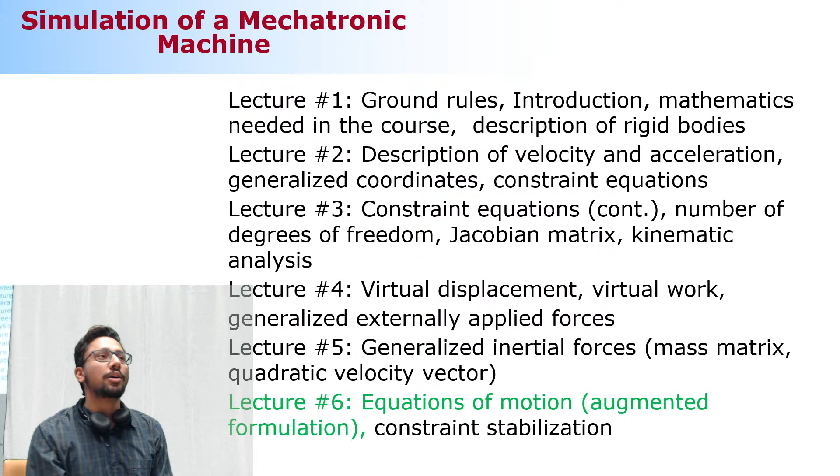Okay, but before that, some sneak peek from last week's lecture. So in last week's lectures, we learned that there are two kinds of forces whenever we are dealing with physical systems, right? There are external forces, and then there are inertial forces. We learned that we can express the external forces in terms of generalized coordinates. Is that word familiar to you guys? Okay, so using external forces, you can express any kind of forces acting on the body, which can be from hydraulic actuators, from pneumatic systems, from spring dampers, from anything, right?

Can you see my face now, online participants? There was a comment. I think yes, now. Okay.

So in a similar fashion, we can also use this inertial forces, and we can express that in terms of generalized coordinate.

Now, what is the difference between generalized coordinate and global coordinate? Can someone answer me that? Anyone?

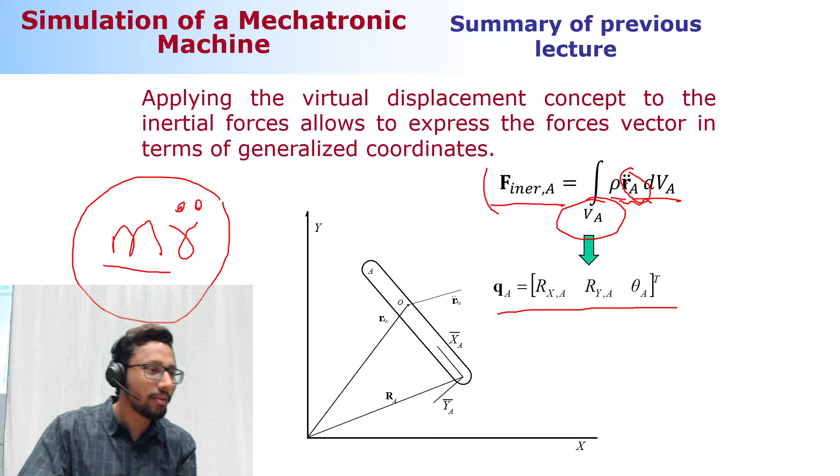Okay, now moving on. So how can we express these inertial forces into generalized coordinates by using mapping? This is that mapping function, and how does it come about? It comes because we use the concept of virtual work, and more specifically, the concept of virtual displacement.

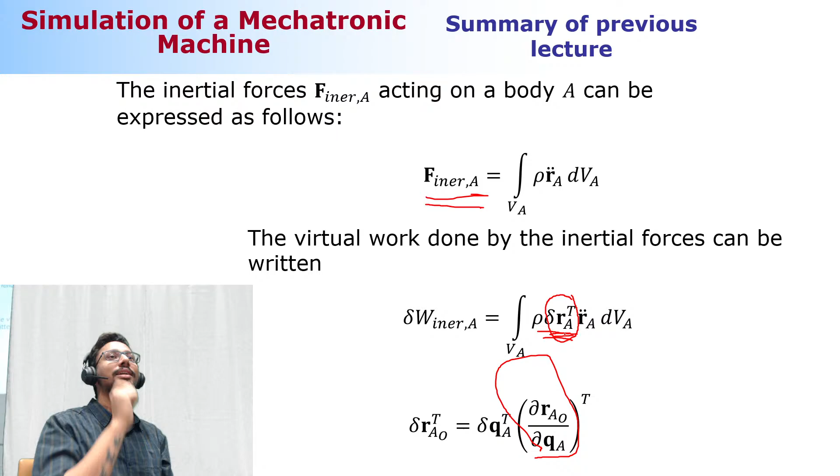So if you consider these inertial forces, and you multiply that with an infinitesimally small position - why this delta? It means it's extremely small. Don't go for the physical interpretation of this. Just mathematically, imagine in your mind that there's a very small movement of this particular body, and this displacement is called virtual displacement. The work associated with this virtual displacement is called virtual work, and for that reason we express virtual work as delta w.

Okay, now we have learned earlier that this mapping between the global coordinates and the generalized coordinates can be done using this mapping, where the mapping is the partial derivative of your position with respect to the partial derivative of all the generalized coordinates.

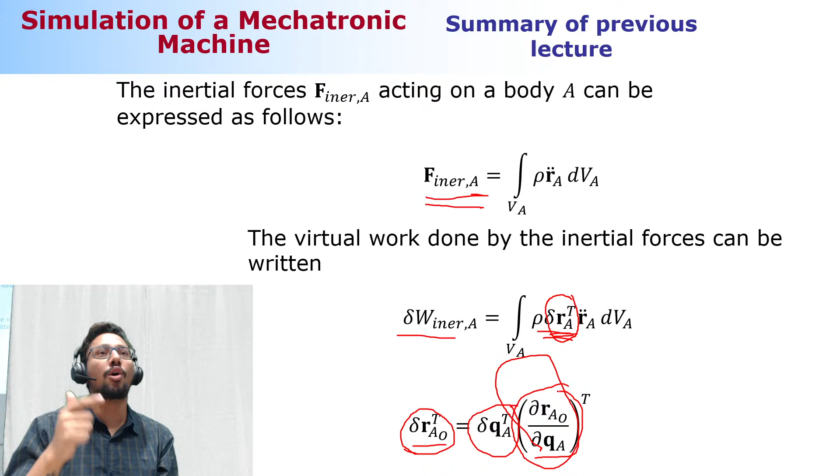So moving on, we have also learned about the acceleration. I'm making some really bad drawings, guys, because I don't have a pointer like Aki, and even my laptop isn't interactive so he could draw on his screen. So I'm trying with my mouse to model it, so bear with me.

But anyway, this acceleration of any point A can be expressed in a standard form, right? We've learned this already, guys. So we are just representing something. We know that a position can be expressed as the position of the center of the body coordinate system plus the rotation associated with it and u bar. This is the expression for the position. When you double differentiate it with time, you get the expression for the acceleration.

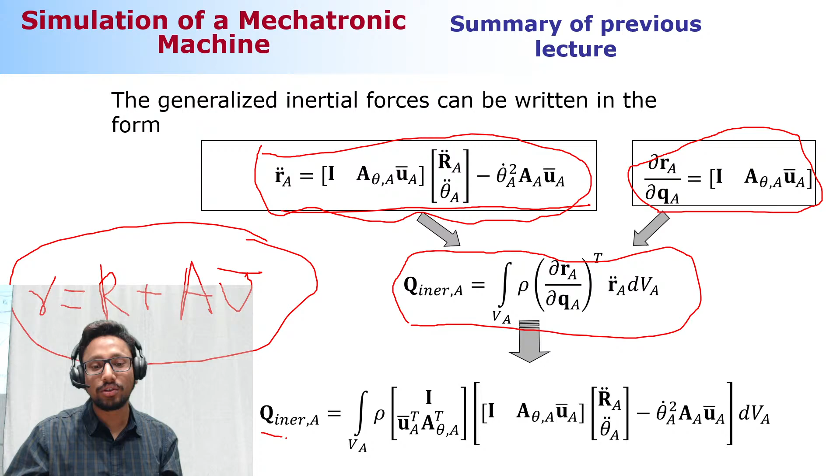And this acceleration can be expressed in a sophisticated form as shown here. Now, when we replace this acceleration term and also this partial derivative of the displacement term, which can be expressed in a sophisticated form as from the earlier lecture, when we use these two expressions within the expression for the inertial force, we can see that the inertial force can be expressed in terms of generalized coordinates, right?

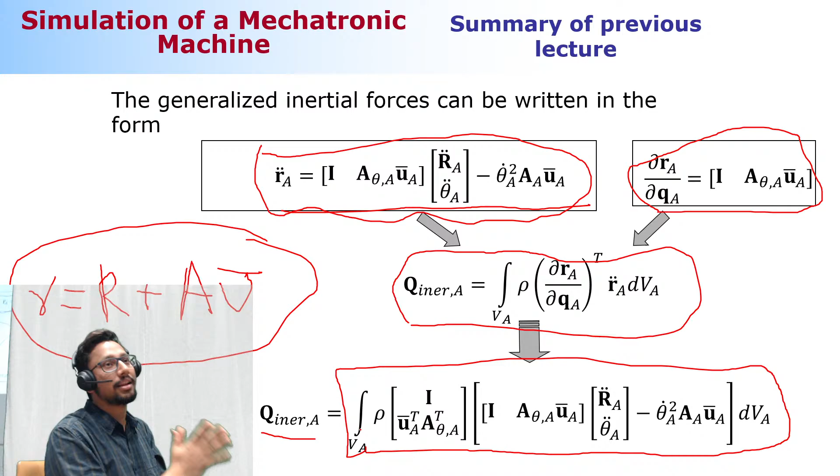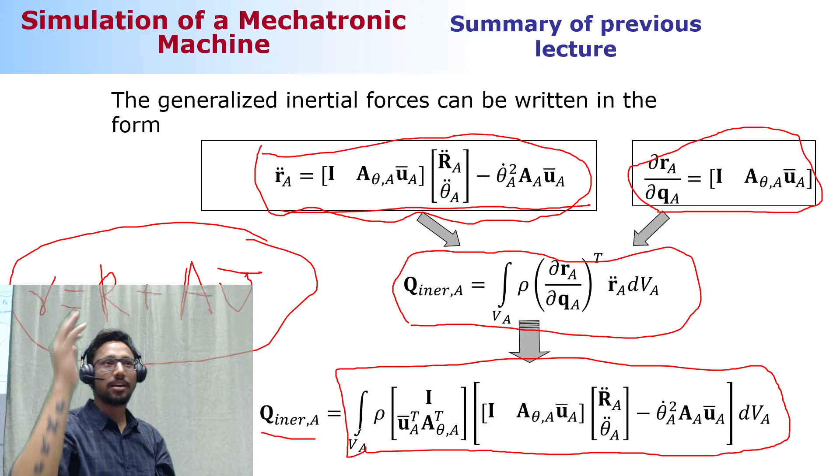So this is the form which you can derive, before the detailed mathematical explanation. Don't worry about the detailed maths involved, try to understand the logic. We are coming from a global coordinate system which has two coordinates in a planar case, and we are shifting to a generalized coordinate system which has three coordinates, right? So when we express this inertial force, how many coordinates should it have - two or three? Three coordinates, correct? So just follow that part.

Okay, now when you see this monster equation, you can see that when you multiply these terms, there will be two terms associated with this inertial force. The first term is some complicated matrix multiplied with the acceleration of the generalized coordinate - correct? This is your generalized coordinate, yes or no? Correct. And similarly, there is another term related to the velocity of the generalized coordinate, and this term is called the velocity vector.

And the first term is called mass matrix. So earlier we had an expression like mass of the body into the acceleration of the generalized coordinate, right? The moment we changed this expression to be expressed in generalized coordinates, we now have a term which is mass matrix multiplied by the acceleration of the generalized coordinate, minus a quadratic velocity vector, because this vector is dependent on the angular velocity of the generalized coordinate in a quadratic form. That's why it's called quadratic velocity vector. Is this clear for you guys?

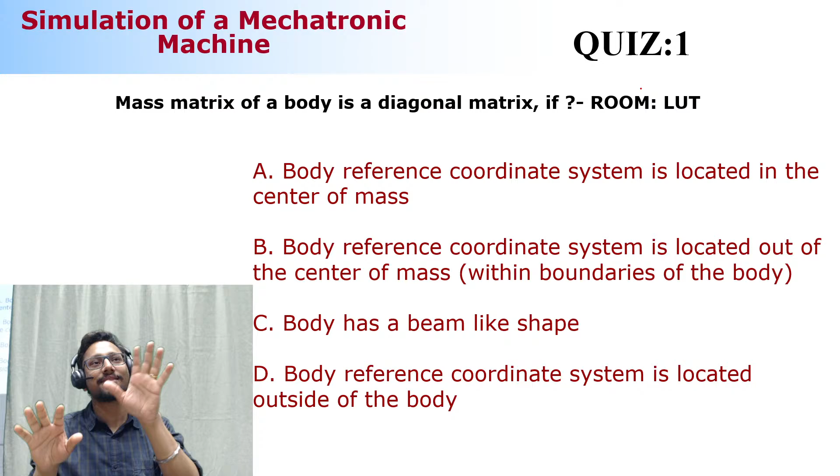As we have learned in the previous lecture, usually the first term is an identity matrix, right? And then the second term is the term associated to the mass moment of inertia. Now, in what condition or situation would the third term - the coupling between the translational and the rotational movement - the mass associated to it be zero? That's what the question is.

And it depends on where the body coordinate system is associated, right? So the body coordinate system can be anywhere from the center of mass to within the body, but not at the center of mass to outside the body, and it should not depend on the shape of the body, right? So what do you guys think? What should be the correct option?

Some guys in the chat window are guessing it to be option A. May or may not be.

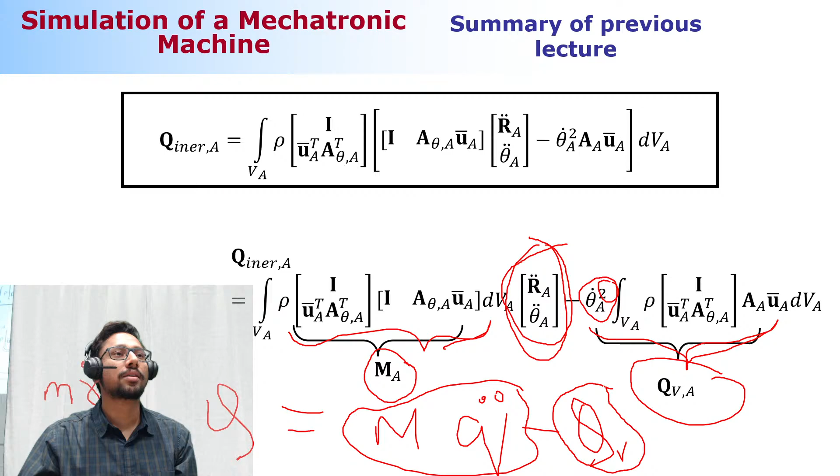So moving on, now let's talk about the quadratic velocity vector. If you learnt earlier in this explanation that when we try to express the inertia forces in terms of generalized coordinates, we end up with this huge mathematical expression. But when we try to simplify, we realize that this Q inertia is a mass matrix multiplied by the acceleration of the generalized coordinate and a term which is the quadratic velocity vector. Correct? So now, what is this quadratic velocity vector?

This quadratic velocity vector, when you take that term, you will realize that it will have three elements. Why three elements? It's because our generalized coordinate has three for a body in space. I'm talking about just one body in space. So for one body in space, we have three generalized coordinates, and when you try to express the inertial reference force, you end up with the mass matrix multiplied by the acceleration of the generalized coordinate, minus the quadratic velocity vector. So the quadratic velocity vector will also have three elements, correct?

And out of these three elements, the third element, which is over here, will always be zero no matter what. Only two elements, corresponding to Rx and Ry, these two terms will be non-zero, but not always.

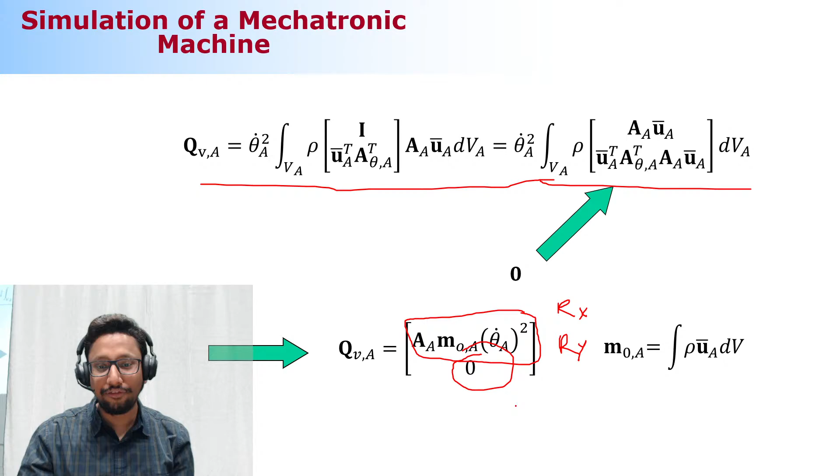So if I take a classical example, if I consider this pen and the center of mass is at the center, right? And you place your body coordinate system here and try to rotate, you will not feel the centrifugal force, correct? But the moment you have the body coordinate system at some other point, you will start feeling that there is some kind of centrifugal force acting, which is resisting, which is hindering you to rotate this body, right or wrong? So that's why, whenever the body coordinate system is at some position other than the center of mass, you will have these terms there.

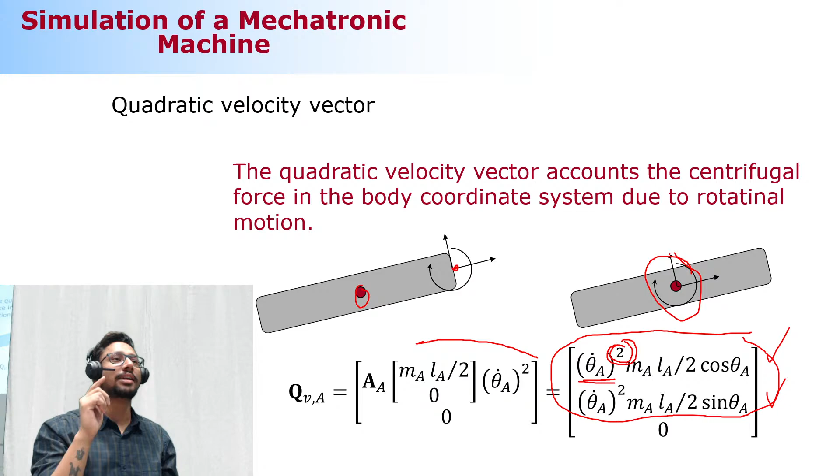But the moment you place your body coordinate system at the center of mass, the quadratic velocity vector will become zero. So basically, this will become 0, 0, and 0. All three terms will be 0, 0, and 0.

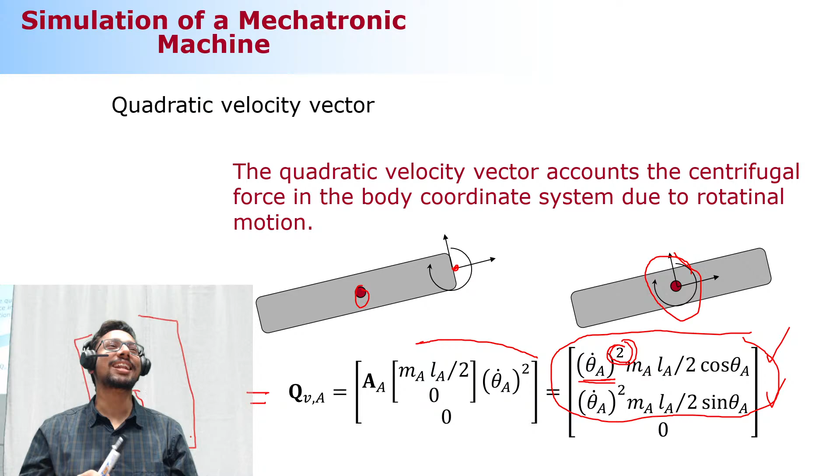Some people are already guessing it to be 100% for the next in-class quiz. Should we move on to it, guys? Yes, everyone is excited, so here comes the next in-class quiz.

The question is: when is the quadratic velocity vector zero? Is it when the body has a beam-like shape? Is it when the body reference coordinate system is located at the center of mass? Or is it when the body coordinate system is located out of the center of mass, or outside the body?

I think I'm going to take a picture and send it to Aki. Some online participants are saying 92%, 98%. What are your guesses, guys? 99? So you're sure at least one student will make it incorrect just so Aki doesn't dance. I'm sure Aki is reading these comments as well.

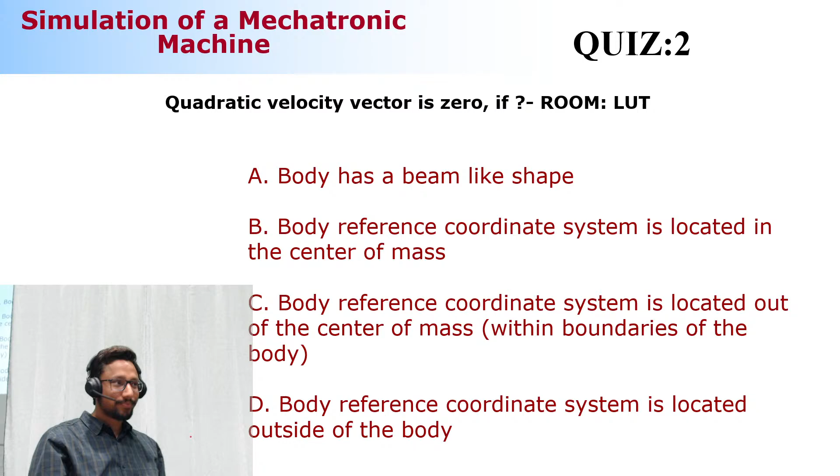When I came to know I'd be delivering this lecture, I was prepared that today I want each one of you to answer correctly and gain as many points as possible. So I'm expecting 100% for each in-class quiz. But now it's completely up to you guys. Let's see how the response is for the in-class quiz.

66. Should we wait another couple of minutes? 69. I think last time it was around 65, right? Yeah. 71. We'll wait another 30 seconds, guys. Please try to answer if you haven't. A can-do attitude can make 100% success rate. You're right about that.

What is CIR? Someone is saying a can-do attitude can work, but then there is CIR. I don't know the full form of that. Guys, once you're logged into Socrative, don't just delete that, try to be there. Is this some joke from earlier courses? Coffee, ibuprofen, and respect — at least I know you guys do something like this for respect, right? So respect if we have 100%. Should we see the answer already?

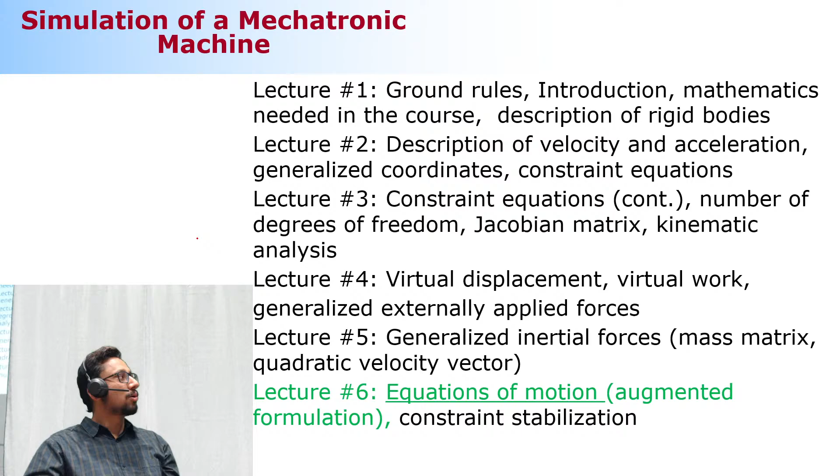So far we've been dealing with only one single body, and we tried to express the external forces and inertia forces for that single body. What we're going to do next is say there isn't just one body but a number of bodies together — let's call it nb number of bodies. For these nb bodies, we try to accumulate the virtual work for the external forces as well as the virtual work for the inertia forces.

This is the place where this concept of virtual work is kind of misused — how, I will explain in some time. What we can do is sum up all the virtual work done by the external forces and the inertia forces, and the sum expresses the total virtual work from the inertia forces and the total virtual work from the external forces. We are making an assumption that this work done and this work done are equal.

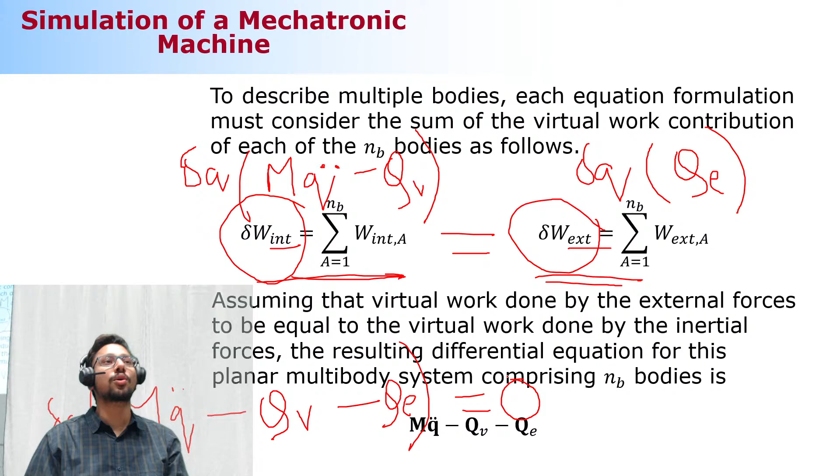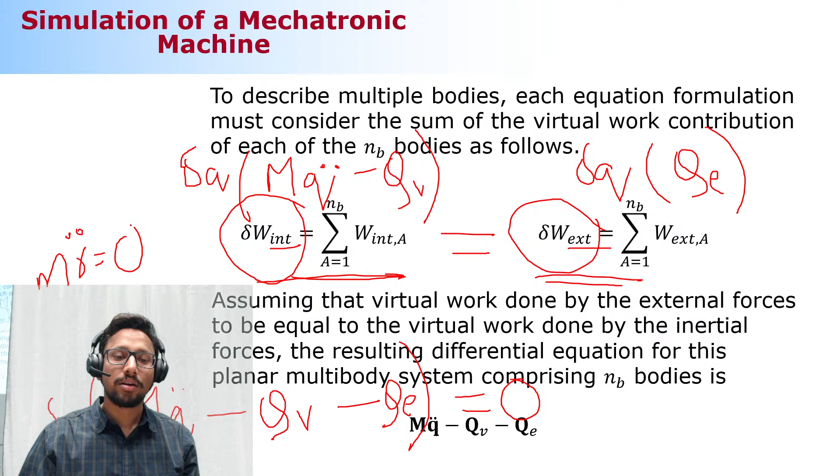Yes or no? So we are kind of following the same principle, that mass into acceleration is equal to 0. Basically, from Newton's second law, any external force is equal to mass into acceleration, but they are expressed in the global coordinate. We are just trying to express them in the generalized coordinate and then take a virtual work of that particular thing.

Okay, so remember this expression, it will come again. So when you see this expression, what is this m?

This m is the mass matrix, this q is the generalized accelerations, this qv is the quadratic velocity vector, and this qe is the external force vector, and all of them are in the generalized coordinate, right?

So now when we talk about the mass matrix, you remember the mass matrix earlier was something like... where is my mouse? Okay, it's here. So the mass matrix earlier was some m1,

then 0 0, then there was some mass moment of inertia, let's say it's m1 l square by 12 for a beam, and then there will be some cross coupling term. It can be 0 if it's on the center of mass, the body coordinate system, right?

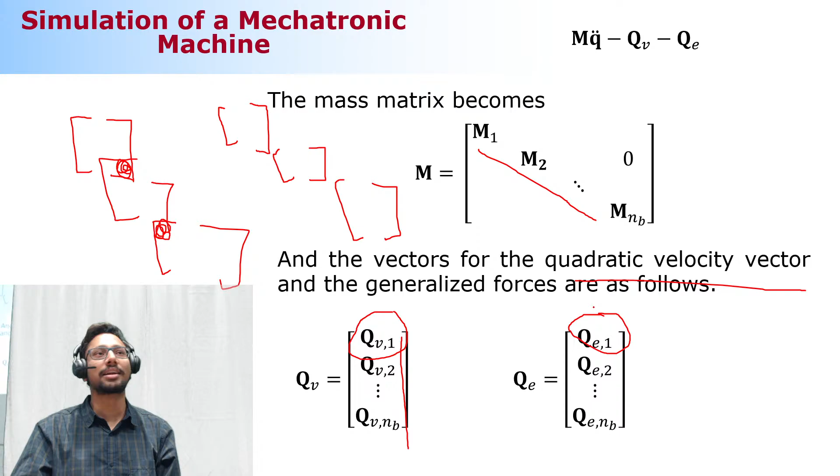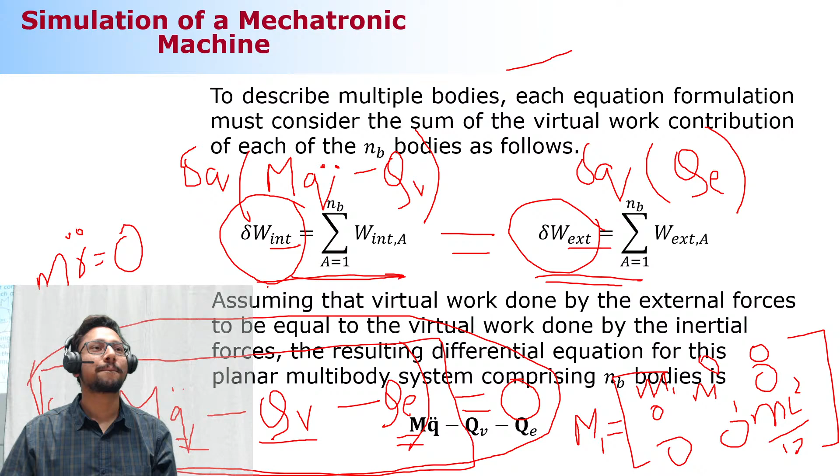Okay, now comes the very important part. First I would like to go over here again. So when we considered this equation, can you see already, or is it complicated? Okay, I will try to draw it here again.

Okay, so this was the expression that we had. Now in order to form the equations of motion, either this term will be equal to 0 or this term will be equal to 0. Correct? When the product of two terms are 0, then either one of them will be equal to 0. But in our case it cannot be true.

Why? Because we know that this term cannot be equal to 0. This is infinitesimally small, the virtual displacement related to the generalized coordinates, right? So this term can be equal to 0, but can we really put that to be equal to 0? Yes or no?

When we talk about bodies randomly in space, not connected to each other, in that case, definitely we can put this expression to be equal to 0.

But in multi-body dynamics, you know that bodies are connected. They are connected using constraint equations, which we also call joints. So for example, this body and this body, when they are expressed like this, where there is no connection, then you can put this expression to be equal to 0.

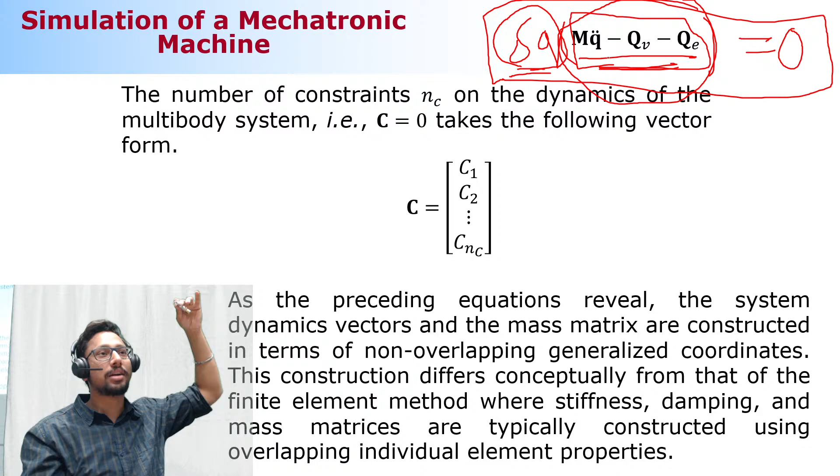But the moment you say there is a connection between them, they cannot be equal to 0, because you are leveraging the use that bodies are independently expressed, but they are not independent, they are connected using constraint equations. So you need to incorporate this condition, called constraint equation, in this particular expression, and then forcefully we can make them equal to 0.

Is that clear? Yes or no? Okay.

So these constraint equations, we say there are a number of NC constraint equations, and a constraint equation is basically a vector arranged in a fashion where each row represents one constraint equation associated to your multi-body system.

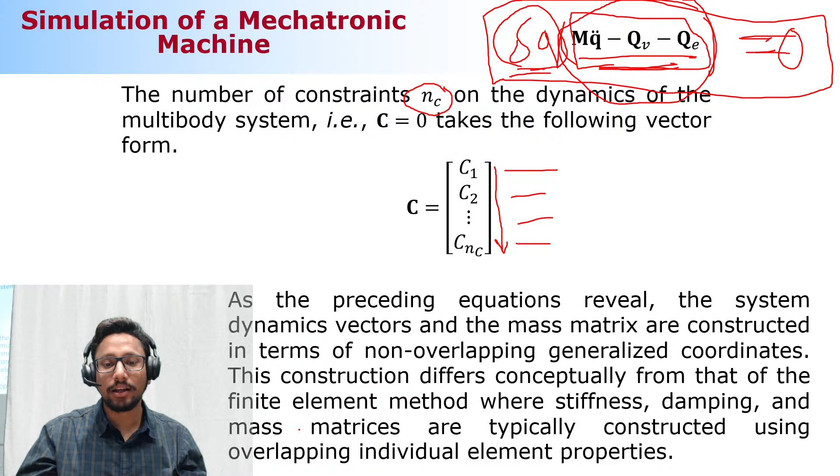So this part I have already explained, that in finite element method your elements are cross coupled with each other, so there are cross coupling terms. But in multi-body dynamics, when you express the mass matrix, the quadratic velocity vector, the external force vector, there are no cross coupling terms, so they are all treated as independent bodies. But then we introduce this constraint equation to say that these bodies are not independent anymore.

So what I explained already, I'm trying to explain again. Generalized coordinates are not coupled, right? So for example, if we have these two bodies, body 1 and body 2, we say body 1 has three generalized coordinates, because every body needs three generalized coordinates: Rx, Ry, and the angle of this body, correct?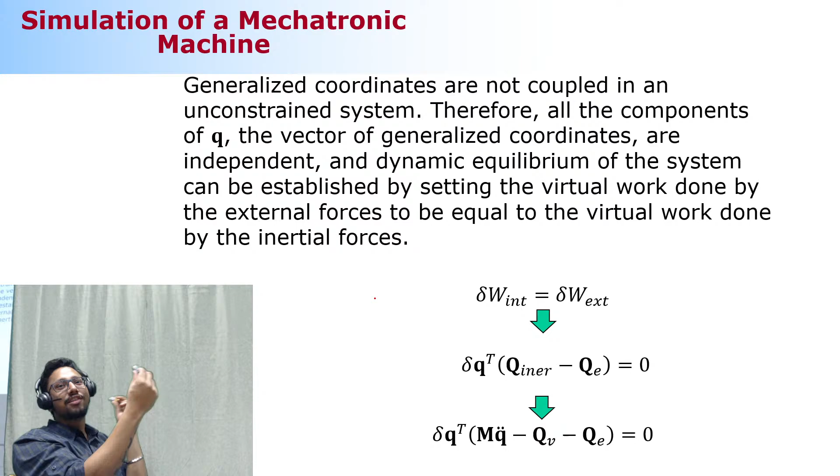Similarly can be said about the second body as well, correct? And these generalized coordinates are not coupled, they are kind of independent, correct? So whenever we talk about the total generalized coordinates in the system, they are always the independent generalized coordinates, which help us form the equation of motion, meaning forming the dynamics of the entire system, right?

And how can we establish the dynamics? We can establish the dynamics from the concept of virtual work. What does the concept of virtual work say? That the work done by the external force is equal to the work done by the inertial force, correct?

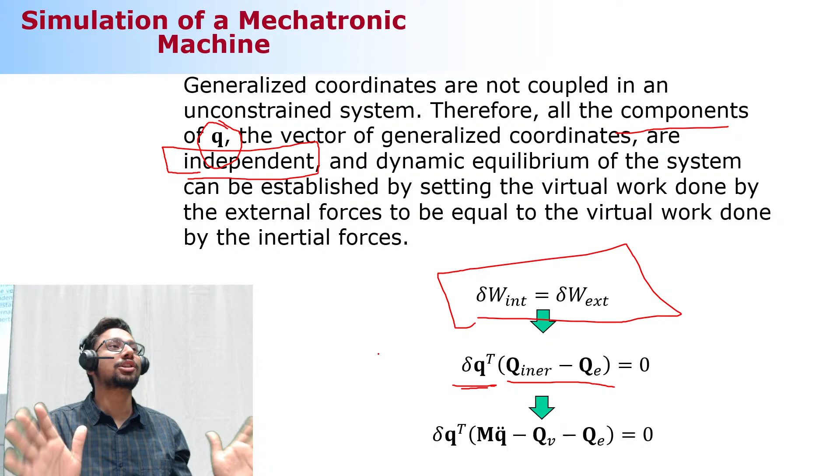And exactly we have done this. We know that the work done is virtual displacement multiplied by the force vector, and now we are dealing in generalized coordinates, because these terms are not the ones expressed in global coordinates but the ones expressed in generalized coordinates. So when we just expand these terms, we arrive at this situation which I already explained to you.

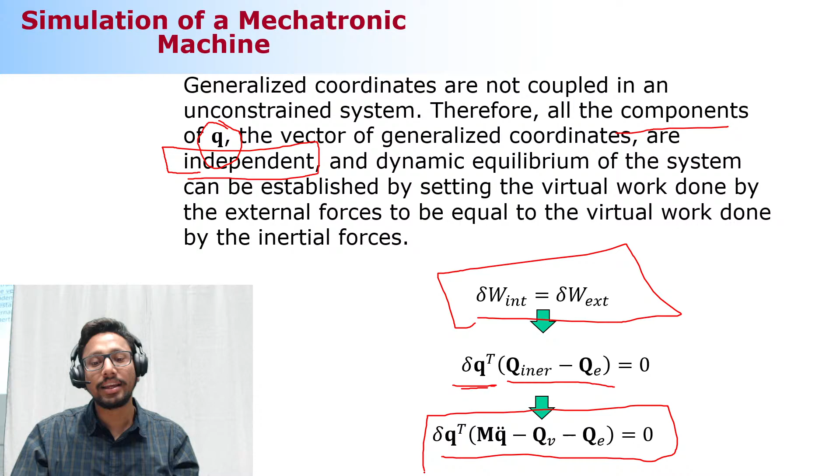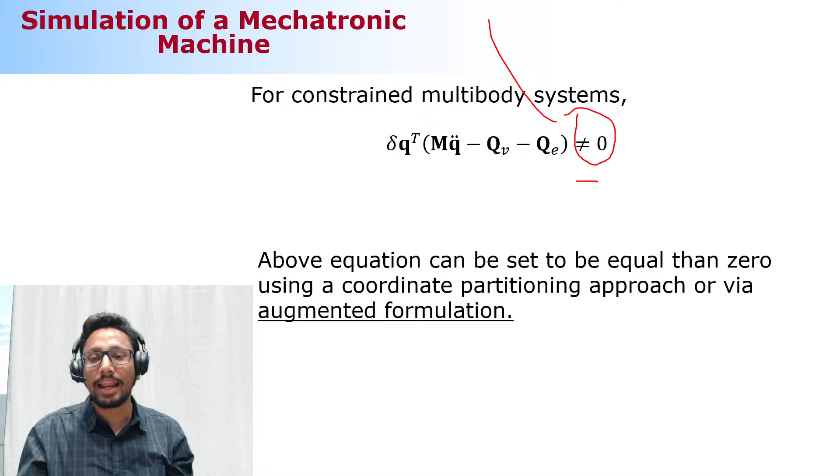Okay, so for a constrained multi-body system, whenever we have constraint equations, because these bodies are connected with each other, by no means can you express this to be equal to 0. It cannot be equal to 0. Just keep that in mind. It cannot be equal to 0.

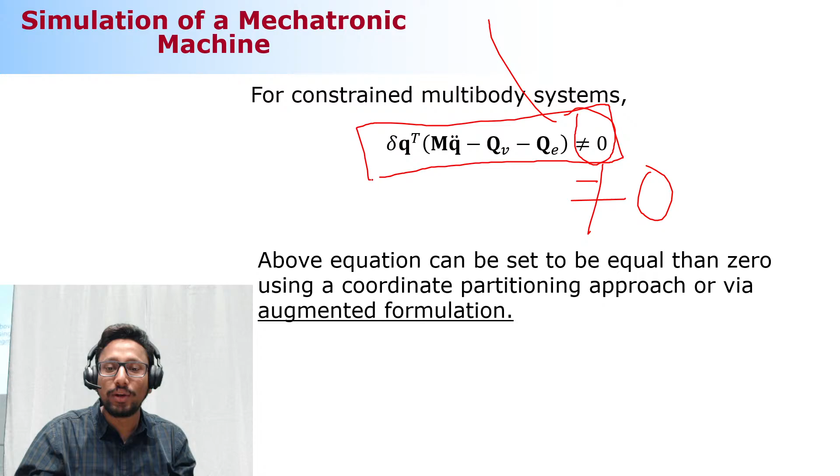Why? Because the constraints are not incorporated. Why? Because the constraints are not incorporated. But this equation, we can forcefully make equal to 0 by using two approaches.

These approaches are called augmented formulation and coordinate partitioning. What it means is we need to find...

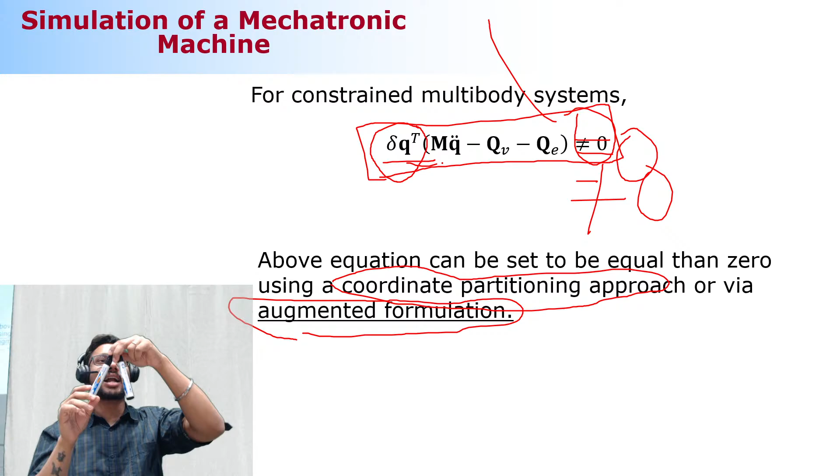a virtual displacement which is kinematically admissible, meaning that the displacement for these two bodies will be such that it will not be against the kinematics of the body. It will not cause a displacement where something goes here and the linkage is broken. No, whenever we define this small finite virtual displacement, it will be such that it is kinematically admissible, and only then can we make it equal to 0.

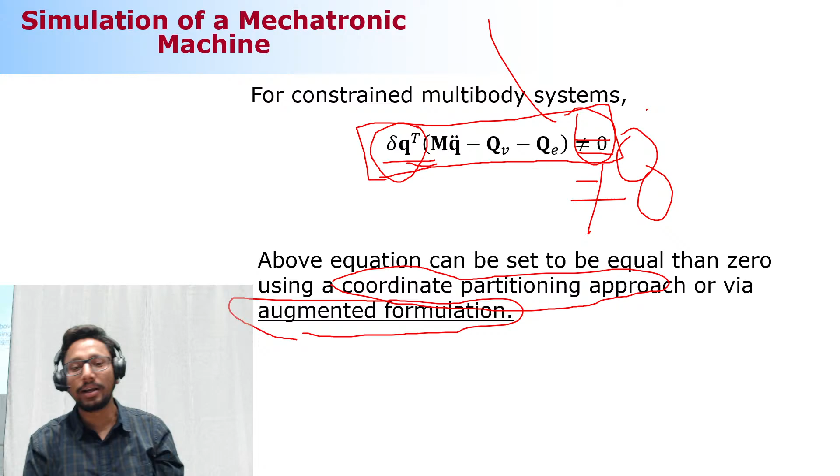How can that be kinematically admissible? When we incorporate the constraint equations. And constraint equations can be incorporated in two ways: augmented formulation and coordinate partitioning.

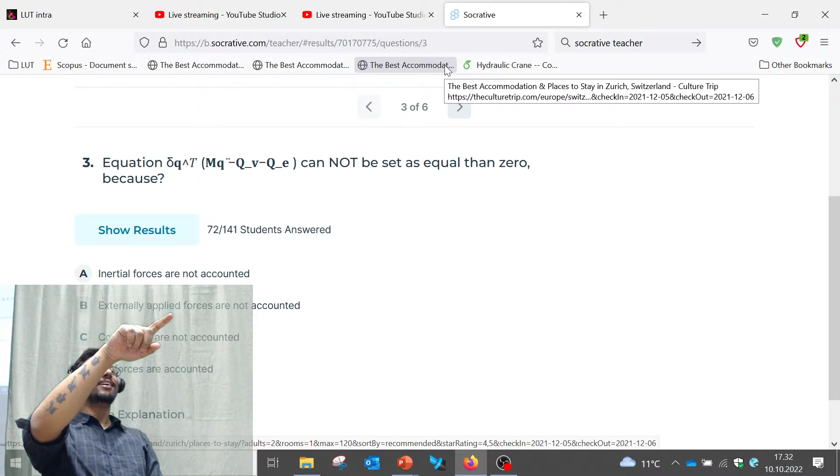Should we have a look at the answer? So you are saying 100. So it was 88, 98, 97, 90, 72, 91. You say all the numbers, someone will get it, come on. Okay, 95. Okay, moment of truth. And I'm saying 89.

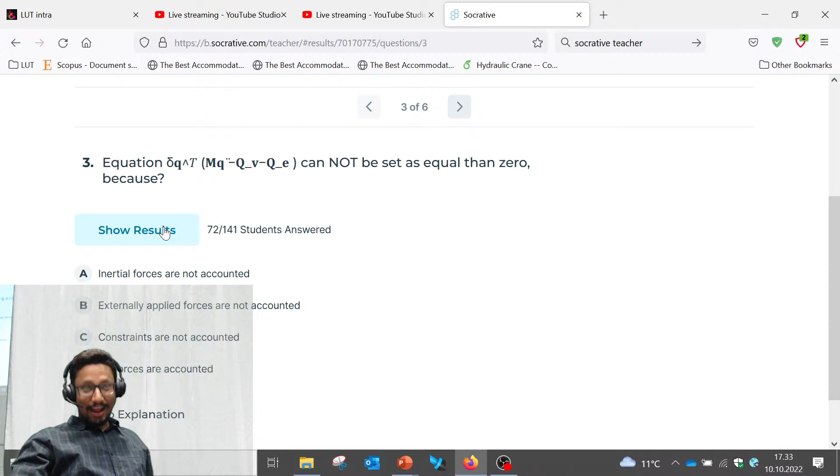Guys, who are those two people trolling us with not 100%? You and Aki, so it's Mostaba and Aki, guys. So who was it? I heard 97. Someone saying 97. No, you said 97. 98. You said 97. Yeah. 87. No one said 97.

97. We still have some in-class quizzes and two chocolates, so I'll save it for the next one. And I see someone in the chat window made a 97% guess, and that was a right guess, but unfortunately I cannot post it to you. But you deserve a chocolate. Buy one and have a chocolate on my behalf.

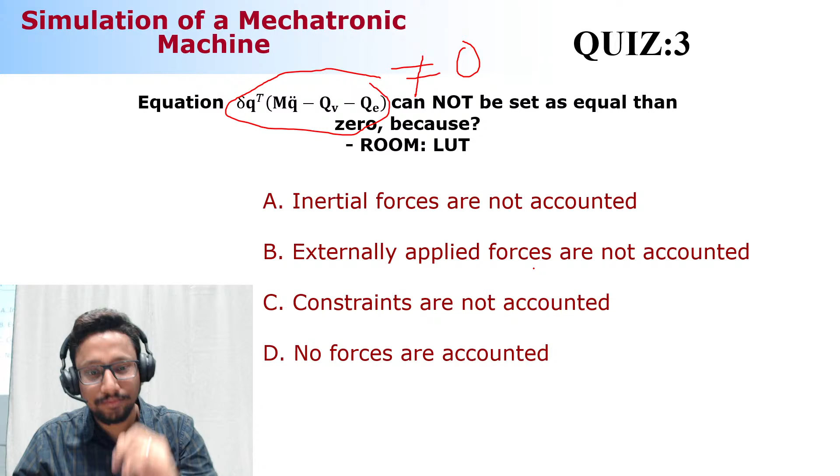Okay, so moving on, guys. Okay, so moving on, now move on. We move on to the augmented Lagrangian formulation.

So, like I told you, we can handle constraints in two ways. One is the augmented Lagrangian that you will be learning today, and another one is coordinate partitioning that you will be learning probably after your midterm exam. And by the way, before I forget this.

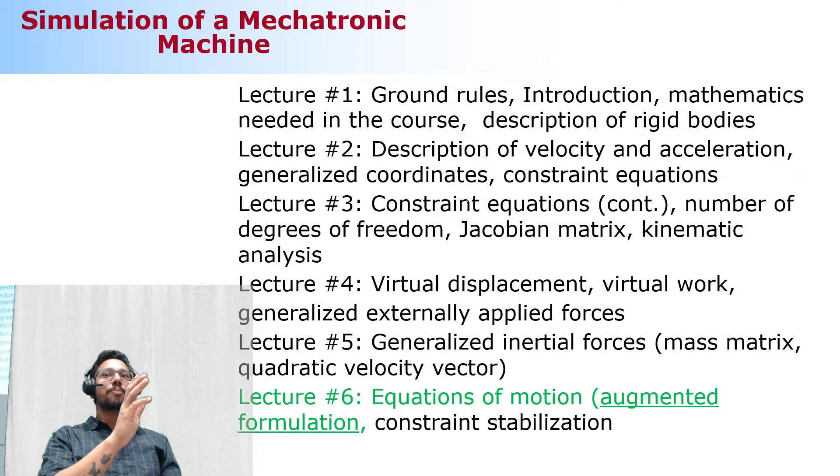Next week, there will be a lecture from Professor Aki Mikkola, and he will be basically summarizing everything that he has taught you so far. He will also explain what are the important topics that you should focus on for the midterm exam. So if you are planning not to participate, it's a wrong decision. I will suggest you participate because he will literally tell you which topics to focus on in order to get good points from the midterm.

And the week after that, we will have the midterm exam. So the midterm exam will be in week 43, I guess that is week 43, so two weeks from now. The midterm exam will be available for one entire week. It will be completely on Moodle.

So under topic 1, you might already be seeing midterm exam 1, right? That link will be activated in two weeks from now, and it will be available from Monday till Sunday midnight, like your homeworks. And you will have two attempts. My first suggestion would be to make an attempt already during the start of the week, around Monday or Tuesday. If you are scoring less points, study the lecture material, go through these lectures again, and then towards the end of the week, around Saturday or Sunday, you can make another attempt.

And the best grades from these two attempts will be taken. So we will not average the score. We will take the best score, whatever you have achieved between these two attempts. Is that clear to all of you? Any questions regarding the midterm exam?

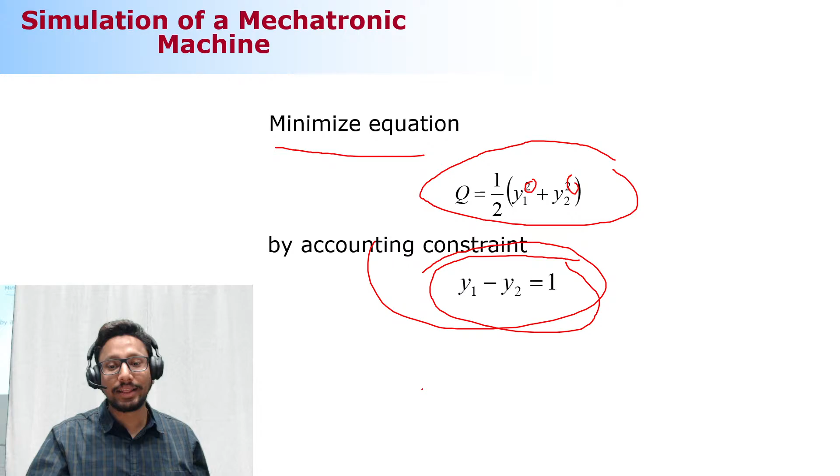Whenever we have an equation like this, we need to minimize this equation by accounting for this condition. So you have an equation which is of second order, and you need to minimize this equation fulfilling this constraint. So what are these points, or what are these positions where this equation will have its minimum value within this limit? How can we do that?

So we can take this equation. These equations are dependent on two terms, y1 and y2. So what we can do is, first we can try to solve for y1. How can we do that? We can compute y2 from this condition and put it back into this equation. Once we do that, we have a form something like this.

Then in order to find a maxima or a minima, what we do is differentiate that equation. So we try to differentiate this function with respect to y1. We are doing a partial derivative of this function with respect to y1, and we obtain this expression, which is 2y1 minus 1 equals 0.

So whenever there's a maxima or a minima, the derivative will always be 0. In our case, we are trying to find the minimum, the minima. And the minima can be obtained at y1 equals 1 by 2.

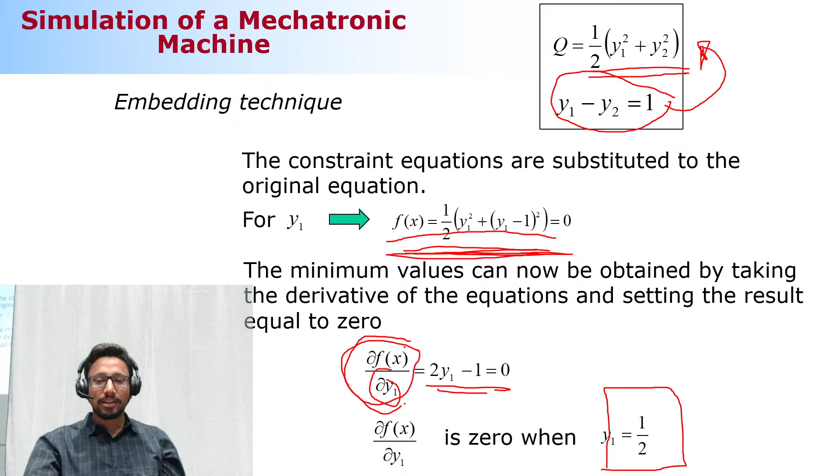How do we know this is a minima and not a maxima? When you double differentiate this using the same procedure, you will find an expression which is greater than 0. When it's greater than 0, meaning it's a minima. And I think most of you have learned this already, so there's no rocket science, I believe.

Yes or no? A thumbs up or a thumbs down, guys? Everyone? Not so confident, thumbs up?

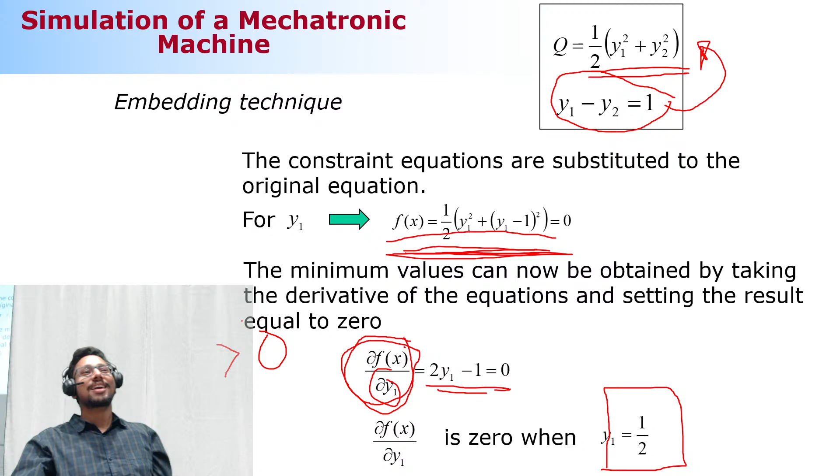Okay, so moving on. Now we try to do the opposite. We try to compute for y2. How we can do that is we simply take the expression of y1 from this condition and put it back here.

Following the same differentiation rule, we find that this partial differentiation of this function with respect to y2 will be 0, and if you double differentiate it, the value that you get will again be greater than 0. So whatever value this function is 0 at is the minima, and that value is y2 equals minus 1 by 2.

So now you have two conditions. Basically this equation will have a minimum value when y1 is equal to half and y2 is equal to minus half, correct? And these values are also fulfilling this condition, so we were able to find the solution within this condition.

Now moving on, a more generic expression of what we just learned from Wikipedia, and how this might be important for us for the equations of motion, because so far I have been telling you about forces, external forces, inertia forces, generalized coordinates, and then all of a sudden I'm asking you to minimize a function with respect to a condition, right? It is important for us, guys.

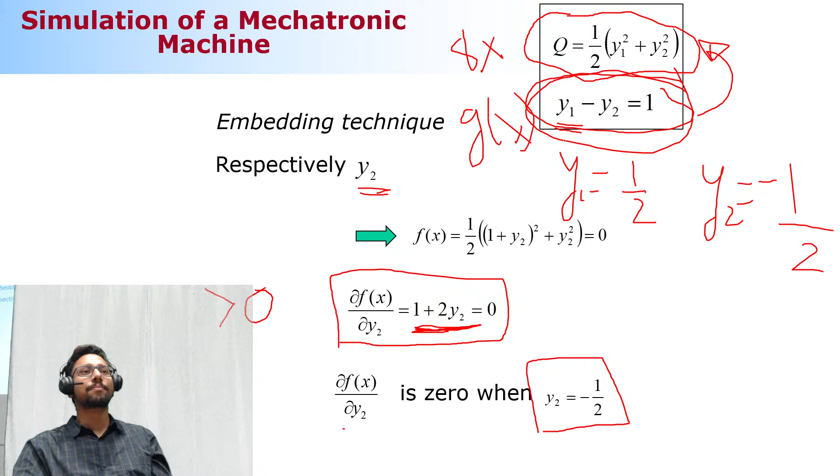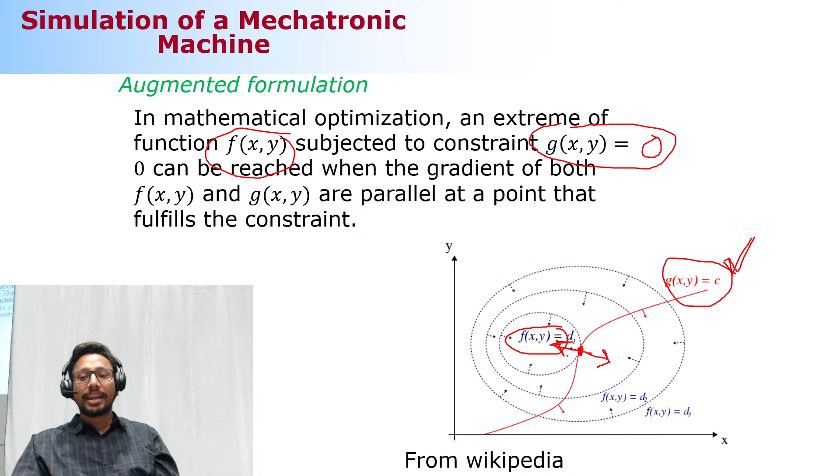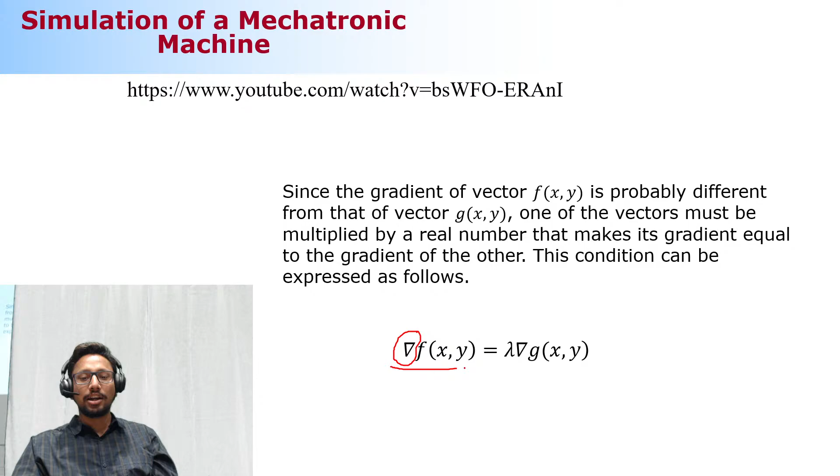So now moving on, a more detailed explanation about this is, as I told you, their gradients should be equal. And how do we express the gradient of these two functions? We express the gradient using this reverse delta, saying the gradient of this one should be equal to the gradient of the function g. But it's not necessary that the gradient will be exactly equal to the gradient of the function, right?

There you have to multiply it with some scalar quantity in order to have that equal sign. How can you multiply? You can multiply it with a term called the Lagrange multiplier. This term will ensure that the gradient of your function under consideration is equal to the gradient of the condition multiplied by the Lagrange multiplier.

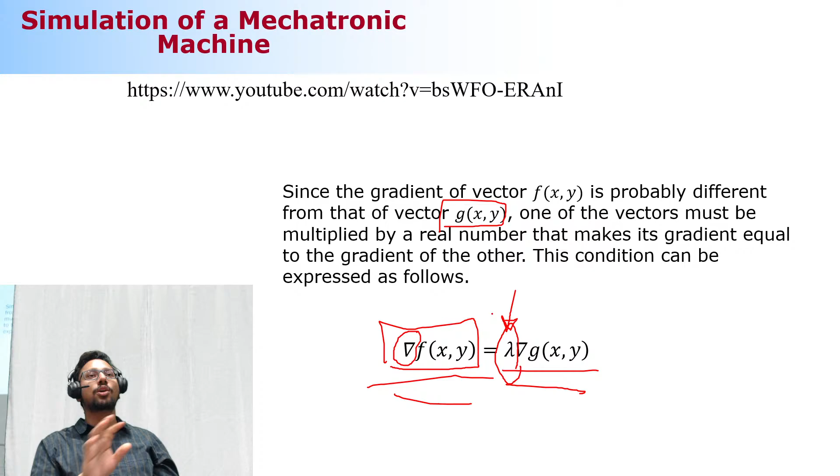Now if this explanation is difficult for you, don't worry. I'm trying to explain this from the point of multi-body system dynamics. This is no rocket science, nothing too complex, but something you have already learned, and now we will try to connect dots from your past to your present. How?

So suppose we have a function which we want to minimize using this constraint. The same example we saw earlier, correct? And there we were solving it using partial derivatives, setting them equal to 0, and coming up with the values of the variables to satisfy that condition, right? Here we will try to do a similar thing but with the augmented Lagrangian approach that I just explained.

So what primary variables do you have here? You have y1 and y2, right? These are your primary variables, or you can also call them generalized coordinates, correct?

So now try to take the gradient of this function q and this function g with respect to this primary variable, with respect to this generalized coordinate. When you take the gradient, what is gradient? Gradient is just a partial derivative operation. So you are trying to...

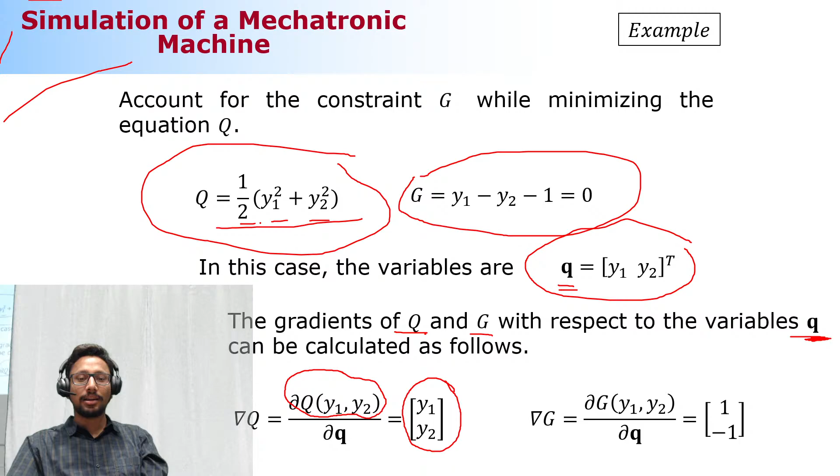...take the partial derivative of this function q first with respect to y1, then with respect to y2, and the gradient will be a vector of these partial derivatives with respect to y1 and y2. Is it confusing?

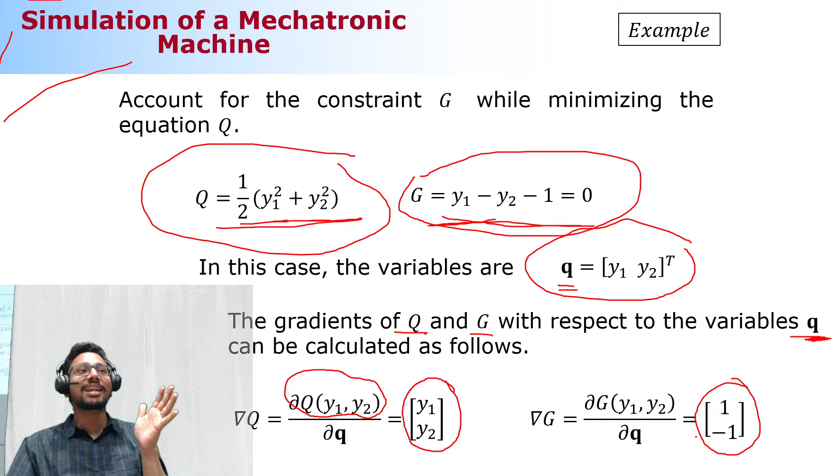Simple? Okay, similarly you do the same for this function g. You do that by partially differentiating it with respect to y1 and y2, and you get this vector. Now, what I explained about the augmented formulation approach is that this gradient will be equal to this when it is multiplied with the Lagrange multiplier. And exactly, we will do that.

What we do is come up with this condition. In this case, we are multiplying it with minus lambda, and this equation needs to be considered along with the condition as well, because this equation alone cannot determine everything, since you are introducing another variable, lambda, and you don't know its value.

So from this condition, these two equations arise. You already have an unknown y1, an unknown y2, and now you've introduced another unknown, lambda. So there are three variables but only two equations here. You need another equation, and that equation is the condition itself - your constraint equation. Once you incorporate this constraint equation, you have three equations and three unknowns.

And when you solve them, you get the same values for y1 and y2 as 1/2 and minus 1/2. This is something we just did a while ago, correct? Yes or no? A thumbs up or a thumbs down?

You guys seem sleepy, so the next in-class quiz is coming. Is everything clear for the online participants as well?

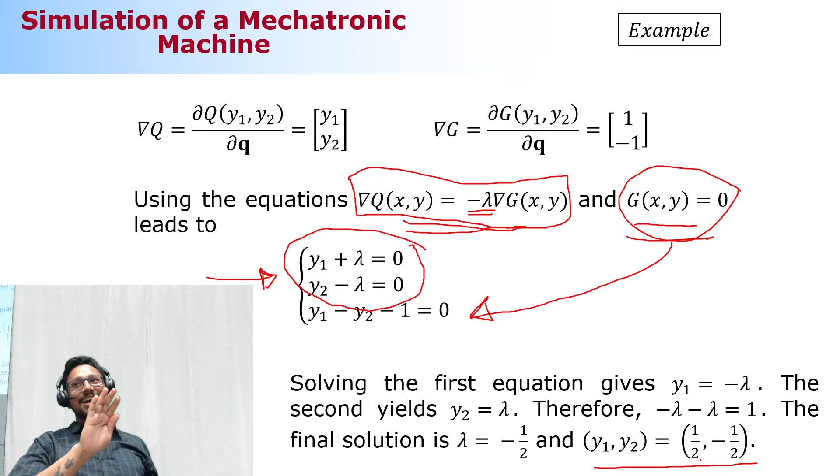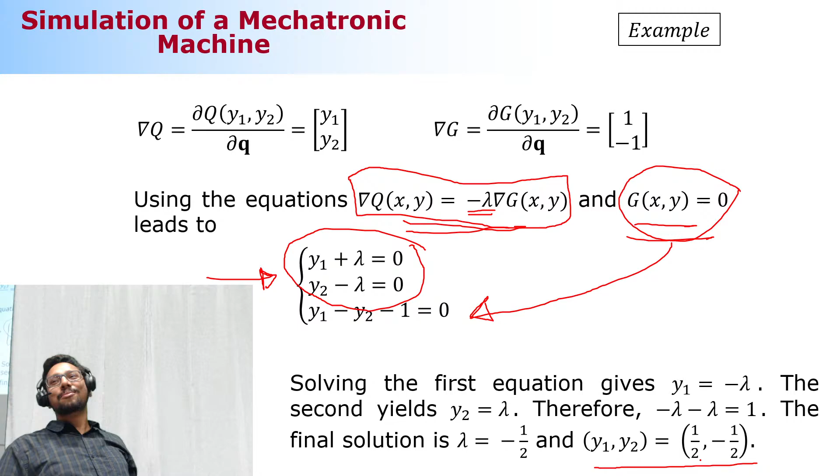Perfect. So this is one story I was telling in my tutorial session - whenever I see sleepy faces, I miss my student days when there used to be bean bags in the library. If you go to the top floor of the library, near the exercise corner, that used to be a sleeping spot with huge bean bags. You could simply go and sleep there, and I've done that multiple times. Trust me, sleeping in the library is a different kind of fun altogether. So whenever I see you guys sleeping in class, I feel like you should go to the library, grab your own bean bag, and sleep there. But anyway, moving on.

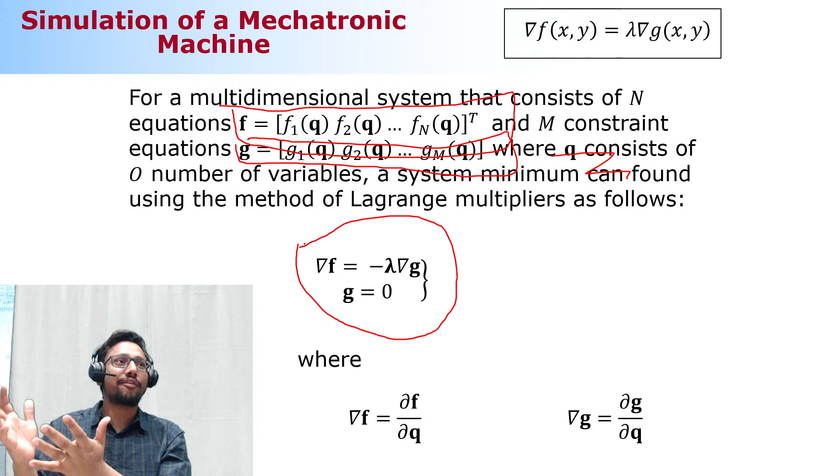So a more generic expression about what we just learned is: when we have a function f and a constraint equation g, we can find the minimum of this function fulfilling this constraint when this condition is fulfilled, saying that the gradient of the function is equal to the gradient of the condition multiplied with Lagrange multipliers. This alone is not sufficient to solve everything. You need the condition itself to solve everything.

Now try to see the relation between what I just explained and what we have been following from the multibody point of view. When I said this equation, mq double dot minus qv minus qe, whole thing multiplied by delta q is equal to 0, in that case we wanted to put this equal to 0, but we could not. Why? Because the conditions were not fulfilled, the constraints were not fulfilling.

So now, about what I explained just now with what we have: in our case, this gradient is basically this term here, and the gradient of the condition is basically the Jacobian of the constraint equations with respect to the generalized coordinate. Yes or no?

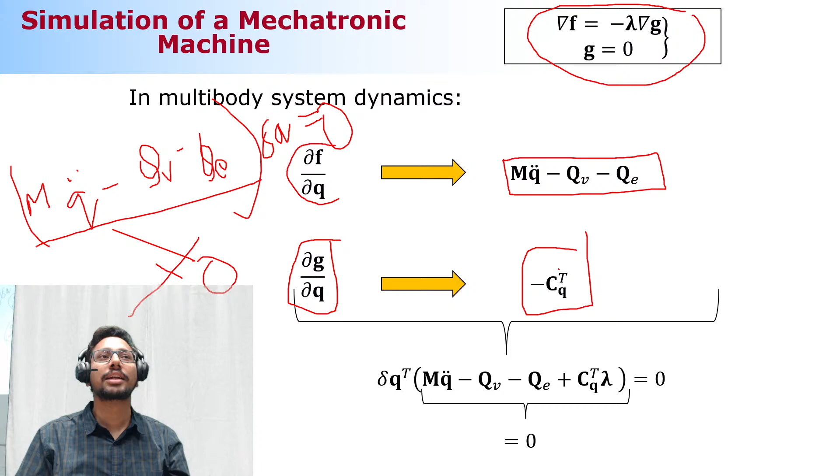So how we can arrive at this mathematical expression is that when we incorporate the gradient of the condition, so the gradient of the constraint equations, then this entire expression which was equal to 0, the actual form should be this, where we have incorporated this Jacobian of the constraints. Now this expression inside the parenthesis can be equal to 0.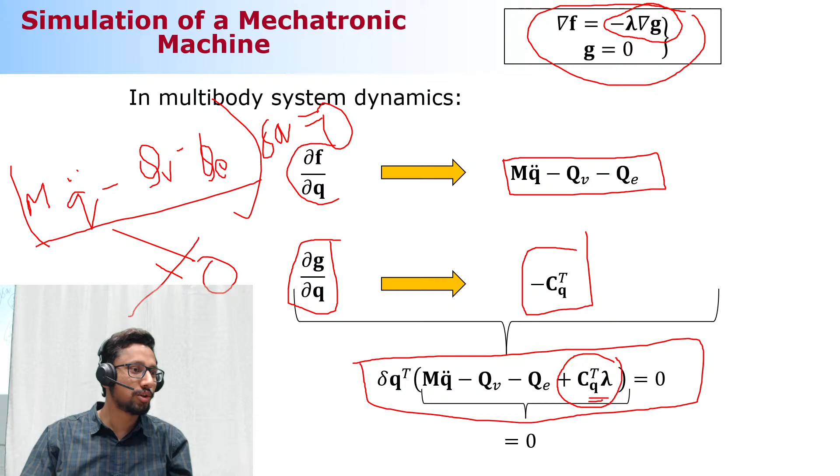Why? Because now bodies are connected using these conditions. What is that condition? Constraint equations. Yes or no? A thumbs up or a thumbs down? Everyone, online participants? Okay, no comments, I'm assuming it's okay for you as well. Okay, thumbs up, very good.

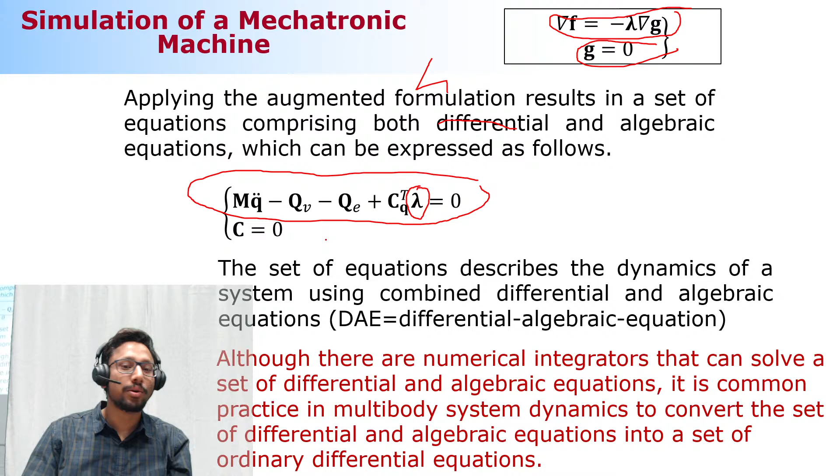So now, as I told you, this equation alone cannot solve everything. You need the condition itself as well, right? This equation alone cannot solve everything, because there are some additional variables as well, and you need to incorporate the condition, that is the constraint equation as well. Now, so far, if you are with me, well and good.

We have almost reached forming the equation of motion using the augmented Lagrangian formulation. Now, if you see this set of equations, the first set is differential equations, and the second set is algebraic equations. So this form is called differential algebraic equation, DAE.

There are some numerical integrators that can solve such differential algebraic equations, but my suggestion to you, and it's a very common practice in multibody dynamics, is that we try to convert this entire differential algebraic equation into ordinary differential equations. Then there are many different integrators available to solve ordinary differential equations.

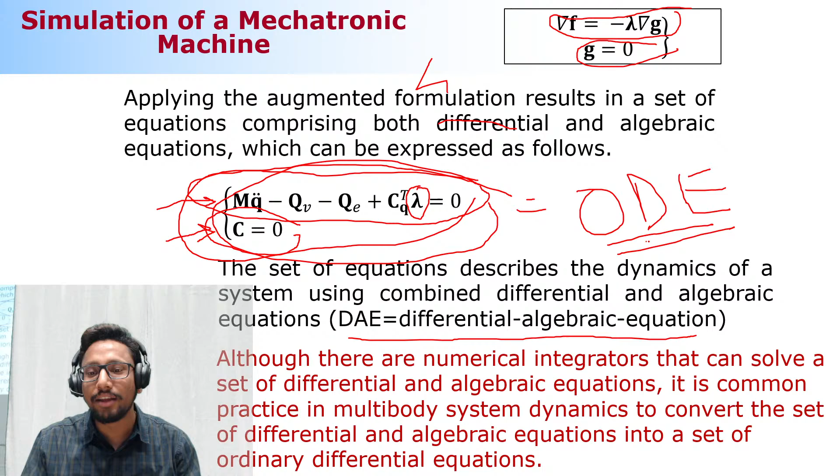For example, connecting it with your tutorials: ODE45. Whenever you go to the solver setting, you have ODE45, ODE15s, ODE23. So these are the different integrators. Now you're trying to make the relation: we need to convert this differential algebraic equation into an ordinary differential equation. How can we do that?

This conversion can be done by double differentiating the constraints. When we double differentiate the constraints, we see something similar with respect to kinematic analysis. When you guys were doing kinematic analysis, you were dealing more or less with a similar term at the acceleration level. Yes or no?

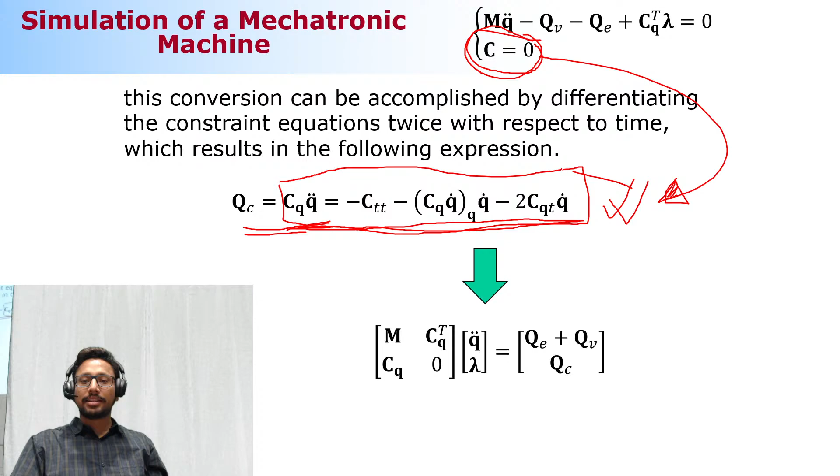So this term will be exactly similar from your kinematic analysis, meaning that when we double differentiate, we are saying the acceleration level constraints are also being fulfilled. Instead of this C, we consider this expression, because this is also a differential equation. When we consider this equation and this particular equation, we can form this sophisticated expression, which is your equation of motion using the augmented Lagrangian method.

So if you see the first half of this equation, this is exactly the same thing as here. And the second half of it is exactly this part. Is there any confusion, guys? Yes, no? And what is the physical interpretation?

So guys, I think the in-class quiz is coming. What is the physical interpretation of these Lagrange multipliers? The physical interpretation of these Lagrange multipliers is that they represent reaction forces.

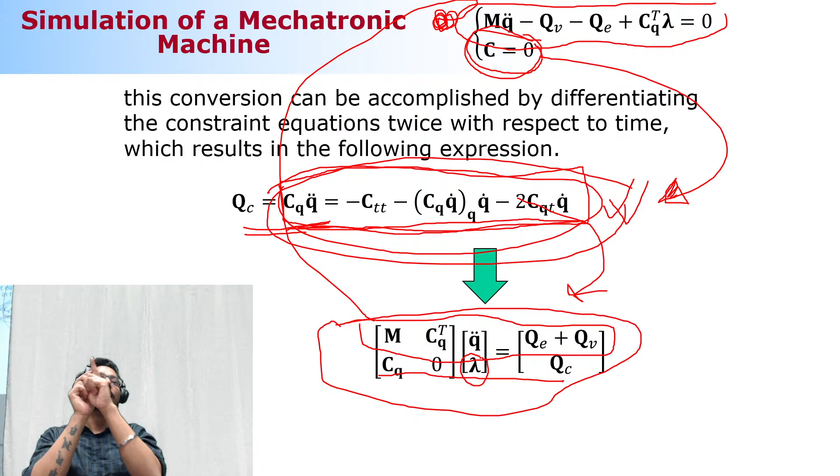If I talk about a simple pendulum, how many generalized coordinates does a simple pendulum need? Everybody needs 3 generalized coordinates, right? And when I am constraining this, this is constrained using a revolute joint in 2 dimensions. How many constraint equations does it need? 2. The number of variables that you need for Lagrange multipliers will be equal to the number of constraint equations that you need. So in this case, there will be 2 reaction forces at this point, in the x direction and in the y direction, right?

So for a simple pendulum, the number of generalized coordinates is 3, and the number of Lagrange multiplier parameters is 2. So there are a total of 5 variables that you need to solve in order to arrive at, in order to solve, this equation of motion. Is that clear or no?

Okay, we are running out of time, so I will quickly summarize what we have done so far. So repeating it again.

We could make this virtual work equal to 0 when we incorporated the Jacobian of the constraint equations, incorporating the Lagrange multiplier. So when we make it equal to 0, then this term in the bracket was equal to 0, and we were also considering the constraint equations along with it.

But we realized this is expressed in differential algebraic form, and this needs to be converted into ordinary differential equations, because ordinary differential equations are simpler to solve.

How we can do that is when we double differentiate the constraint equations, we come up with an expression like this, which is a kind of kinematic analysis at the acceleration level. Then instead of this C, we incorporate this term, and form the ordinary differential equation.

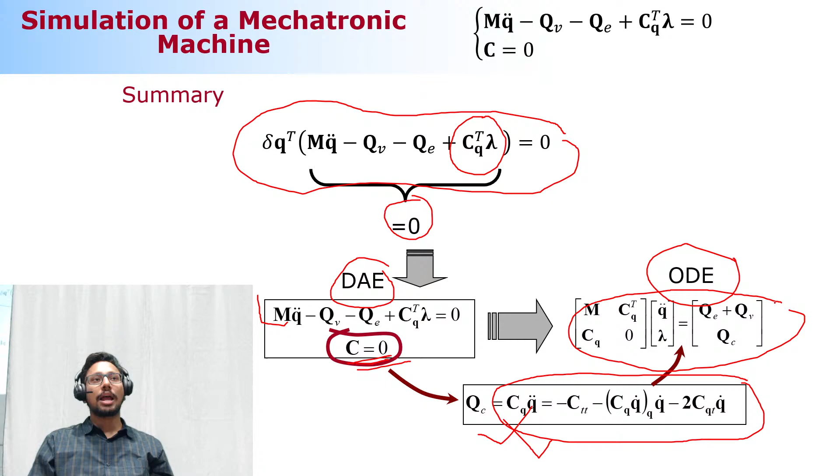The detail of this, if you want to read, is available in the lecture note. But I think the concept might be clear to you, right?

Okay, so coming to the first in-class quiz for this augmented Lagrangian, and with this we can close the lecture.

But the question is, in the augmented formulation, how many unknowns are there? Are the unknowns only the acceleration of generalized coordinates? Or is it just the Lagrange multipliers? Or is it the generalized forces? Or is it a combination of acceleration of generalized coordinates and Lagrange multipliers?

So if you see this equation, it's asking how many unknowns or how many variables you need to solve.

So I just explained to you the example of a simple pendulum, and if you try to follow that explanation, try to imagine how many variables you need to solve using the augmented Lagrangian formulation, and then try to answer it. And the game is on for the chocolate.

Our online participants with me... 98, I am so I am guessing it to be 100%, provided Aki and Mostaba are not trolling us. Mostaba, is Socrative on?

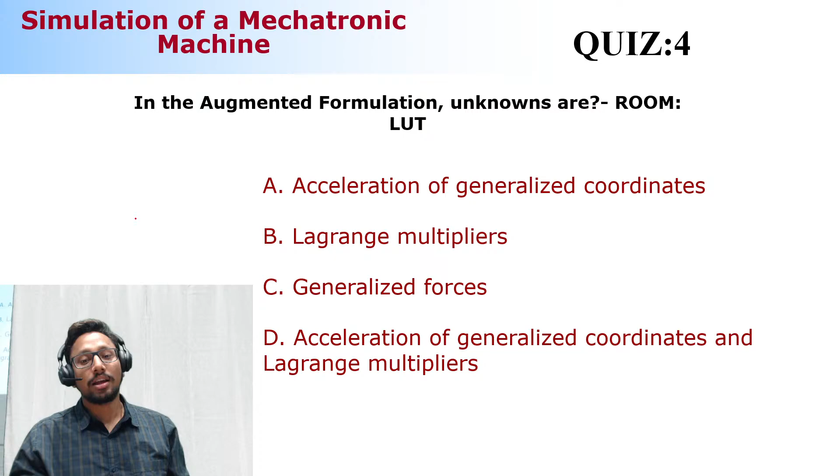So in augmented formulation, the unknowns are the acceleration of generalized coordinates and Lagrange multipliers. So the unknowns are the generalized coordinates and these Lagrange multipliers. This is the vector of unknowns, the vector of primary variables in the augmented Lagrangian formulation. Is that clear?

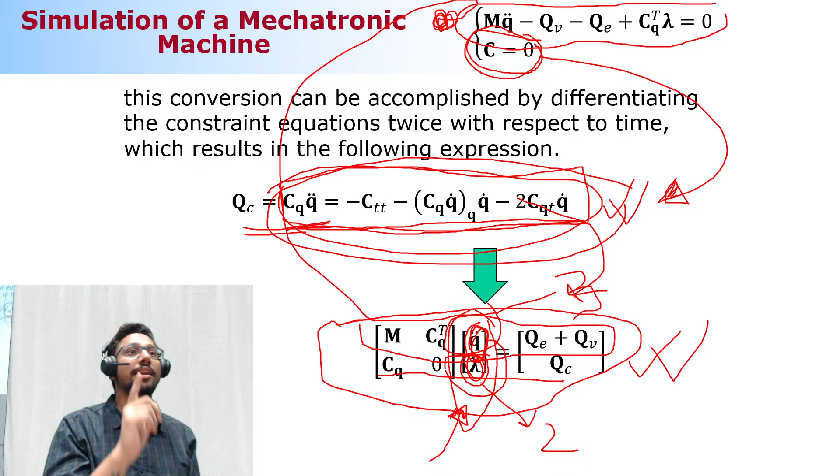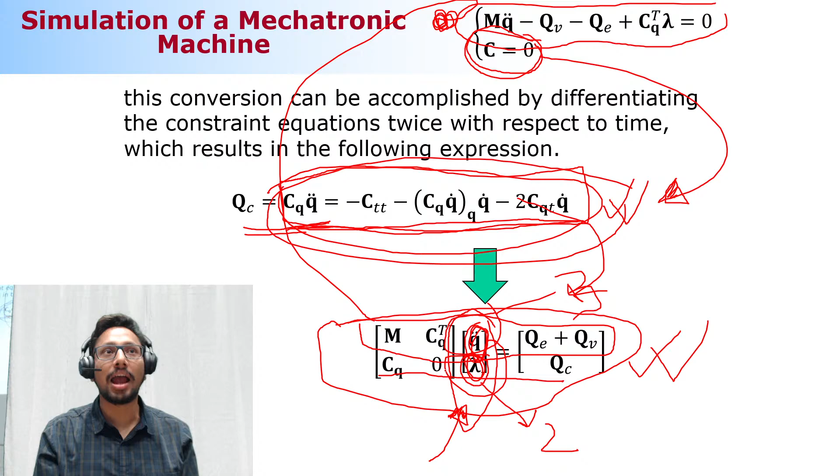Yes? Okay, if so, then we will close this lecture because it's already time and we started with a delay. But there were a couple of slides after this, mainly examples about how to formulate these equations of motion for different examples. Maybe Aki can cover this in the next lecture and then we can proceed with the summary.